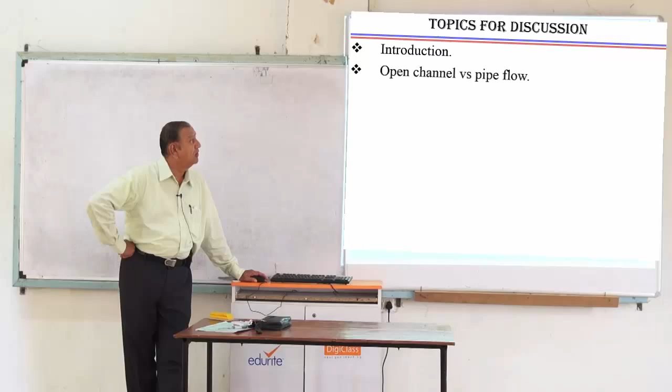So we are going to consider the following topics in our discussion today. First we will have a little introduction to open channel flows and a comparison between the open channel flow and the pipe flow, followed by the various classifications of open channel flows. Like the pipe flows, the open channel flows are classified into various categories of flow.

Then you will receive a little information on the various terms and definitions, as well as the geometric properties of some standard channel sections. Then how the velocity varies within the open channel, as well as the pressure distribution in an open channel, will be considered.

Followed by this, we will take up the basic equations available for the analysis of open channel flow. The most general equations used are Chezy's equation and the Manning's equation, so we will be considering these two equations.

Lastly today, we will initiate a discussion on the uniform flow and the uniform flow computations. So let us proceed.

What is an open channel flow? Any flow where the liquids flow with a free surface, unlike a pipe flow, that means there must be an interface between the water surface or liquid surface and air, that is the atmosphere above it. So that is called an open channel flow.

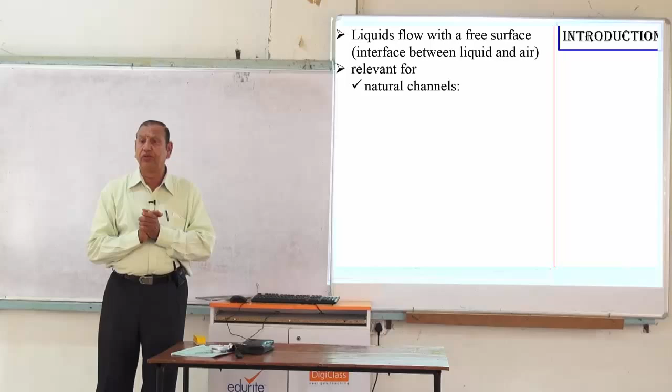Now these open channel flows are relevant for natural channels like this. This is a natural channel formed by nature. It may be a river, or it may be a creek, or it may be a natural stream.

Then streams, creeks, floods - whenever there is a flood, the flood water will be flowing. So that also comes under the category of a natural open channel flow.

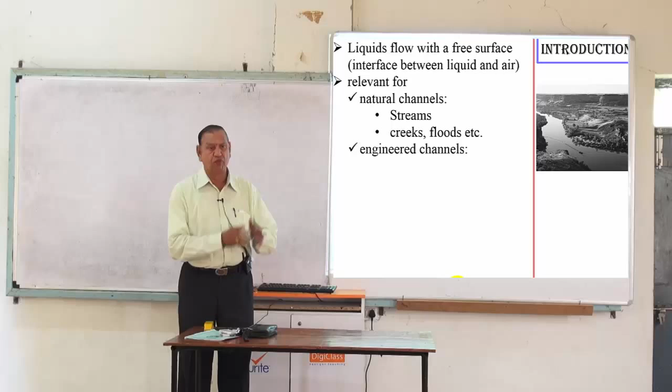Then the engineered channels, that means the channels which we construct for our application, for our usage, to convey the liquid from one place to the other, apart from the pipe flow - these are open channel flows.

This is a channel which is constructed, a lined channel which brings water from a source to a destination point where it is used. Now the water can be used either for power generation or irrigation or for industry or domestic use. So that is the engineered or artificial, man-made channel.

Canals, sewer lines where the wastewater flows, culverts. The culverts can be either full or partial. Culverts are meant to convey the storm water - whenever there is a heavy rain, the rainwater will be flowing underneath the bridge or highway.

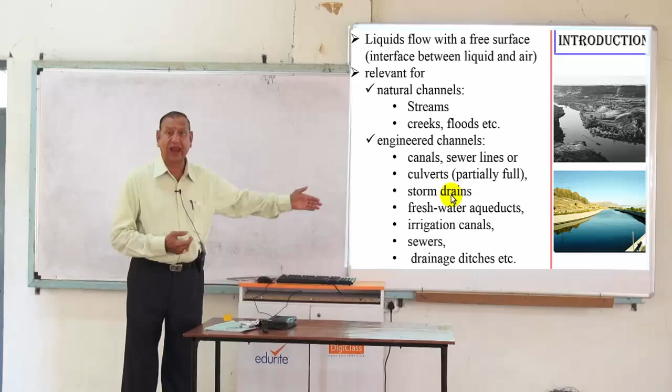Storm drains, freshwater aqueducts - an aqueduct is a structure constructed near the junction of a natural stream and an artificial canal. Irrigation canals, drainage ditches - all these things come under the category of artificial or man-made channels.

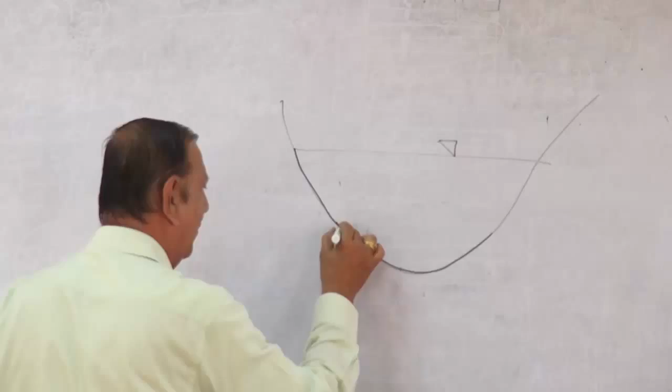Why? It is due to the no slip condition. What is no slip condition in fluid mechanics? The velocity of the fluid adjacent to the boundary will be same as the velocity of the boundary. Now here the boundary is fixed, so it is not moving. Therefore, the velocity of the liquid adjacent to the boundary will have the same velocity, that is zero velocity. So this is called the no slip condition.

It is a very powerful boundary condition in all fluid mechanics problems. So due to that, the velocity will be zero. You can see here, these are the velocity lines - all along this, the velocity is zero, and all along that, the velocity is zero.

As you proceed towards the free surface, the velocity increases. So the velocity is approximately constant all along this line, and the magnitude of that velocity is maybe 0.5 meters per second or feet per second.

So you can see there will be a maximum velocity not exactly at the free surface but slightly below it. The reason is, at the free surface there will be a lot of debris, and the air may be blowing in the opposite direction. So that will offer resistance and reduce the velocity at the free surface. Otherwise, if you just take a cross section and draw the velocity, it should be in fact like this.

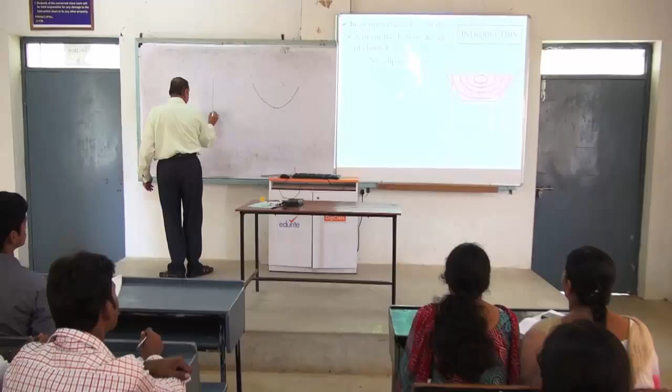Maximum velocity here, zero velocity here. But in reality, the maximum velocity will not be at the free surface but slightly below the free surface. So this is the maximum velocity, slightly below the free surface.

The velocity also varies in the streamwise direction, that is in this direction, perpendicular to the plane of the board. So the velocity will be varying in this direction, and it may also have a transverse direction. So therefore, the flow is always three-dimensional.

But for our analysis, we will assume only one-dimensional approximation for all practical purposes. To solve the practical problems, we consider the velocity to be varying only in one direction. So that is the simplification which we make.

As I was telling, there is a similarity as well as a difference between the pipe flow and the open channel flow. So let us see what are the things that make a pipe flow and an open channel flow. Now this is a pipe in which flow is taking place. This may be sloping like this or sloping in the other direction, or it may also be horizontal. Similarly, this is a channel which is shown with sloping downwards in the direction of flow. So what are the things that differ in between? What is the difference in between these two?

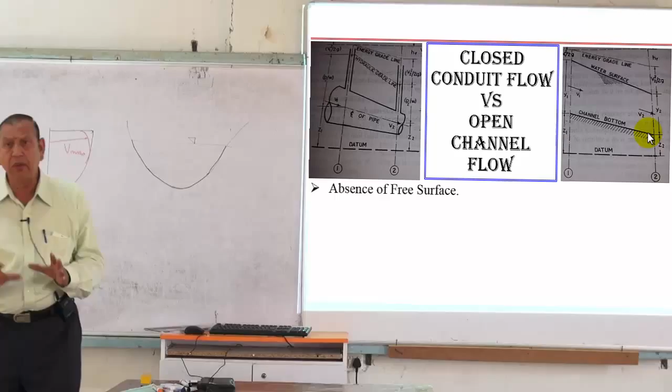Let us see. In the case of pipe flow, there will not be any free surface. It is under pressure. Whereas in the case of open channel flow, you can see this is the water surface, this is the free surface. It is exposed to atmosphere. So the presence of a free surface is the characteristic feature of an open channel flow.

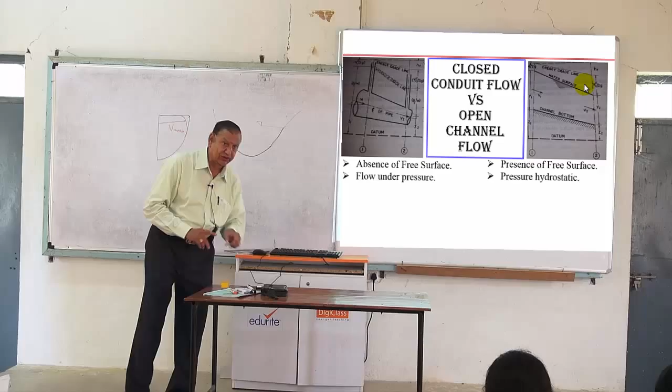Flow is under pressure, whereas the pressure in the case of open channel flows is hydrostatic. What is hydrostatic law of pressure? P is equal to gamma times Y, where Y is the depth of the point under consideration below the free surface. So in that figure, if you take this point, this depth is Y1, so the pressure here is gamma times Y1. If this depth is Y2, the pressure here is gamma times Y2. So that is hydrostatic pressure.

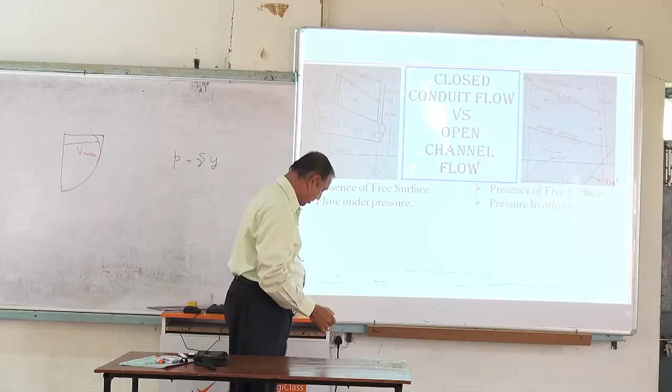In the case of a pipe flow, in order to get the hydraulic gradient line, we can insert a number of piezometer tubes. So this is a piezometric tube. When you insert a piezometric tube in a pipe, the liquid level will rise in it. To what extent will it rise? It will rise to a certain extent given by the sum of the datum head and the pressure head. Similarly, at the other point also the water will rise to an extent equal to the datum head plus pressure head. So the line joining the water levels in the piezometric tubes attached to a pipeline will give you directly the hydraulic gradient line.

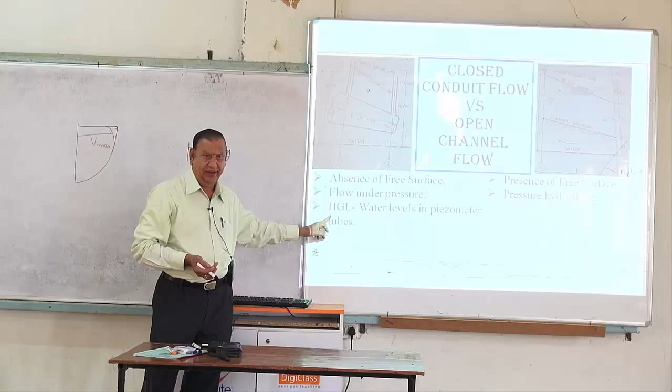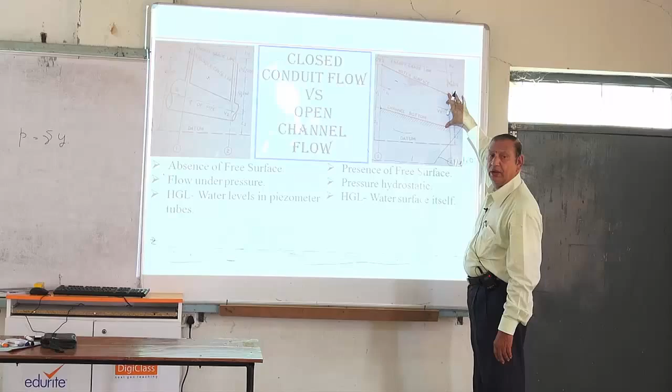In case of free surface flows, that is open channel flows, the water surface itself is the hydraulic gradient line. Because if I take this as the datum, this is the datum head and this is the pressure head, because here the pressure is atmospheric. Similarly, if I take another point here, this is the datum head and this is the pressure head. So this is pressure plus datum, that is the water surface. So in the case of pipes, the hydraulic gradient line is given by the line joining the water levels in the piezometric tubes. In the case of free surface flows, it is the water surface line itself.

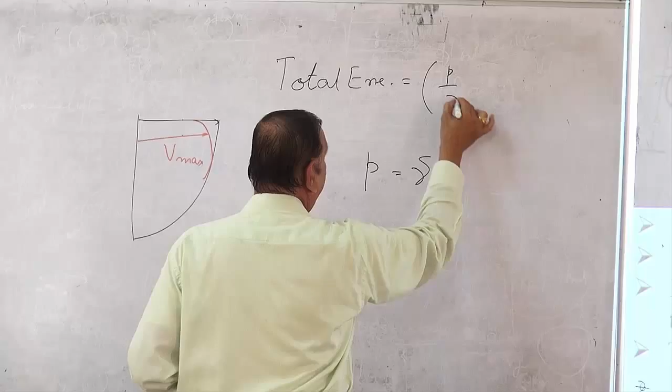And how about the total energy line? The total energy line is one velocity head above the hydraulic gradient line, because total energy is given by P by gamma plus Z plus V square by 2G. So this is the hydraulic gradient and this is the velocity head. So in the case of pipe flow, TEL is above HGL by a value V square by 2G. And in the case of open channel flows also the same thing.

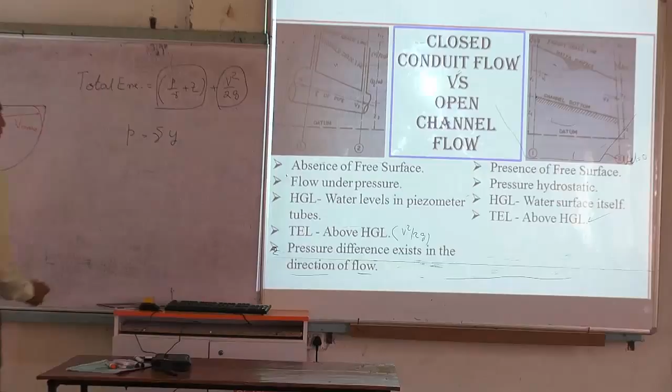Then when you consider the pipe flow, if you take different points, the pressure will be varying, so there will be a pressure difference between any two points in the direction of flow. Whereas here, in the case of open channel flows, the pressure is constant along the free surface. And what is the magnitude of that constant pressure? It is atmospheric pressure.

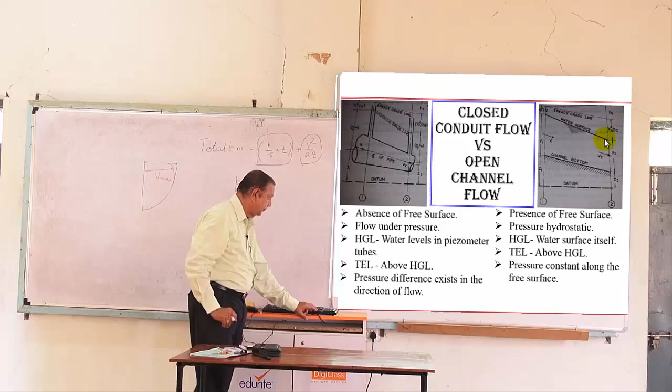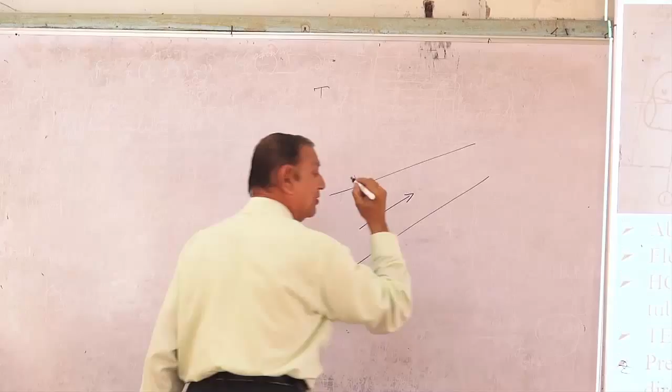Then, pipe flows can be sloping in any direction. It can be horizontal, it can slope downwards in the direction of flow, or it can slope upwards in the direction of flow. We have seen earlier, if suppose there is a pipe, the flow can take place in this direction. It is not necessary that the flow always take place when the pipe is oriented downwards.

The direction will depend upon the difference between the total energy. So if H2 is less than H1, the flow will be taking in that direction, from higher energy to lower energy. So if H1 is higher, which H is again equal to P by gamma plus V square by 2G plus Z.

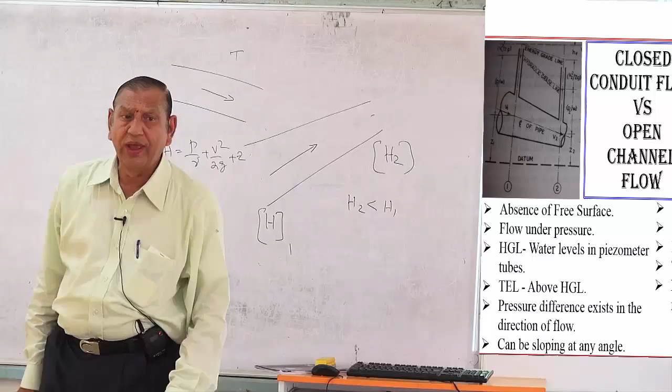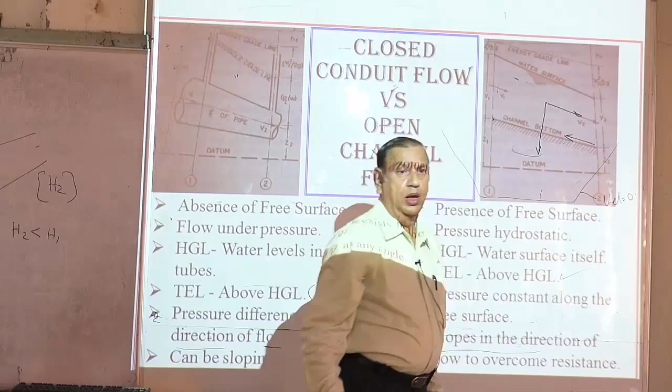Whereas in the case of open channel flows, the flow is possible only when it slopes down in the direction of flow. Why? When it is sloping down, there will be a component of the weight acting downwards, and the component will be acting in this direction. So this component will be compensating the frictional resistance. Only then the flow is possible. Otherwise, it is not possible.

So after considering the difference between a pipe flow and an open channel flow, let us proceed towards the classification of open channel flows. Now in pipe flow we have seen the flows are classified based upon the variations of velocity with respect to time, similarly with respect to space. So here also the open channel flows are classified based upon the temporal variations, that means the variations with respect to time. So they are classified as steady flow and unsteady flow.

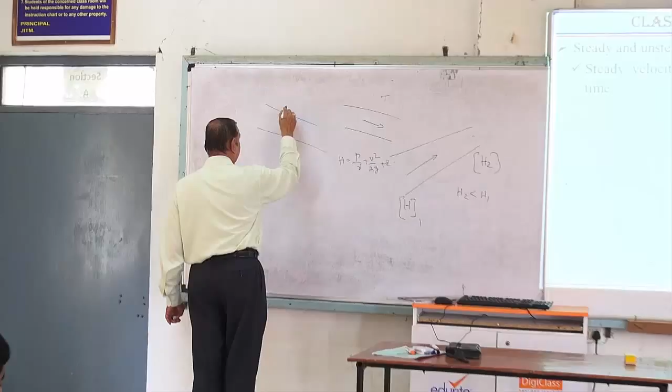What is steady flow? Steady flow means the velocities and the depth at any given point in the open channel flow will be constant. They will not change with time. So if I consider an open channel like this, and any section here, at this section with respect to time, if the velocity is constant, not changing with time, then we call it steady flow. On the other hand, if it varies with time, then it is an unsteady flow.

Can you give me an example of unsteady flow? The situation where the velocity changes with time or the water level changes with time. Whenever there is a rain or storm, what will happen initially? The water level will be less. As the rain water enters into the channel, the stage of the water will raise, so there will be a change in the velocity. That is an unsteady flow. So the natural flows, or flows in natural streams and rivers during flood times, is an unsteady flow.

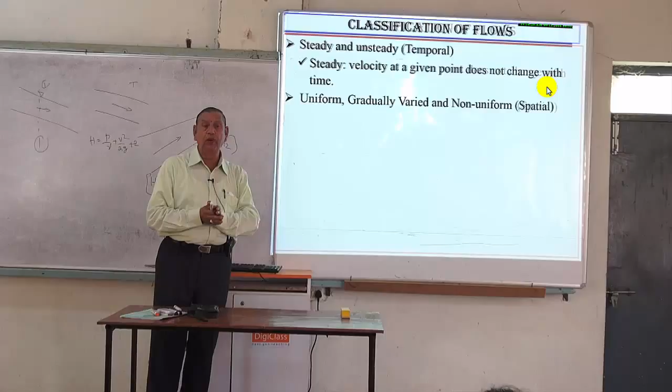Then the other classification is based on the variations with respect to space, the distance. So according to the distance, the flows are classified as uniform or non-uniform: uniform, gradually varied, and non-uniform. Why we call it gradually varied and non-uniform is because unlike in pipes, in open channels, the variations with respect to distance can be over a long distance or within a short distance. If the variations are over a longer distance, it is called a gradually varied flow. But if the variations are within a short distance, they are called rapidly varied flows. So in non-uniform flow, we have two categories: gradually varied flow and rapidly varied flow.

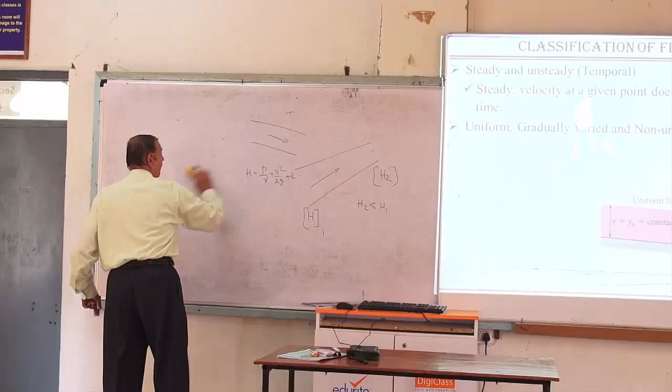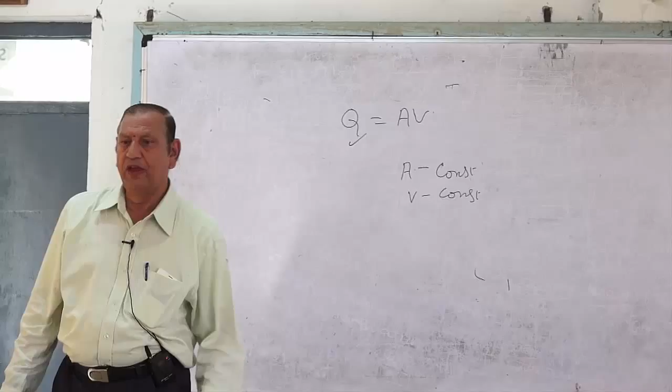So a uniform flow is the one where the velocity is constant at different sections. If you consider one section here, another section there, another section there, at all these points the depth is same. So if the cross section is not changing, naturally velocity will relate to area. What is the relationship between discharge, area and velocity? The continuity equation: Q is equal to A into V. So when A, the cross-sectional area, is not changing, then V will be constant for a given Q. For a given Q, if area is not changing, the velocity will not change. So area means, if I take a rectangle, B into Y is the area. So if B and Y are constant, automatically V is constant.

So that is a uniform flow. In the case of a uniform flow, the depth remains constant throughout the direction of flow. Uniform velocity, at a given instant of time, does not change with respect to distance along the length of the channel at a particular time.

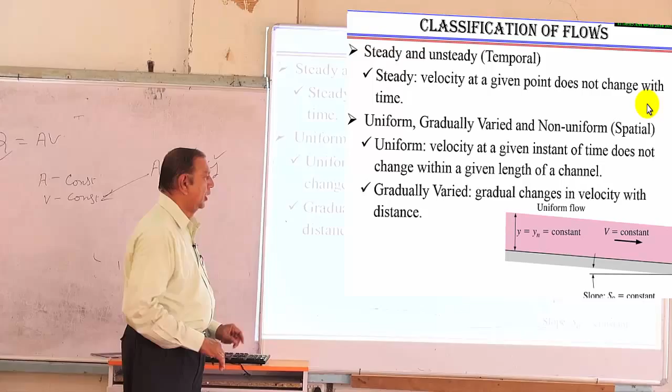So, gradually varied and rapidly varied. And in addition to these types of flows, there is another classification as in pipe flows: laminar and turbulent. Same criteria. Laminar means viscous flows, where viscous effects are more predominant compared to inertia. Turbulent flow involves mixing, where inertial effects are more predominant. So the distinction between laminar and turbulent flows will be based upon the magnitude of Reynolds number. The Reynolds number is defined as usual.

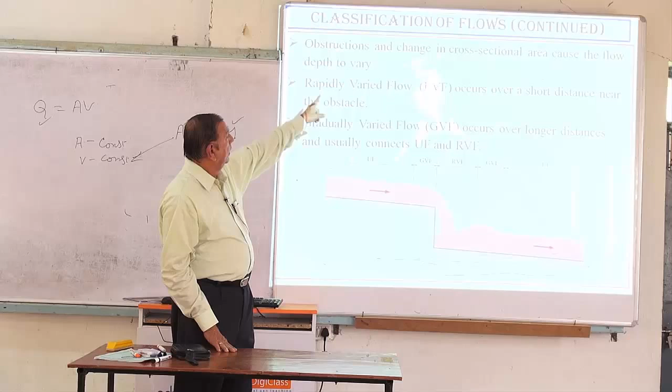So I was telling about gradually varied flow and rapidly varied flow, how and why there will be a change in the distance or depth of flow when flow is taking place. Unless you put some obstruction, there will not be any change. So the change in depth happens only whenever there are obstructions or a change in the cross section, either with the same cross section throughout, or from one section to another if there is a change in the cross sectional area. So then this will be causing non-uniform flow.

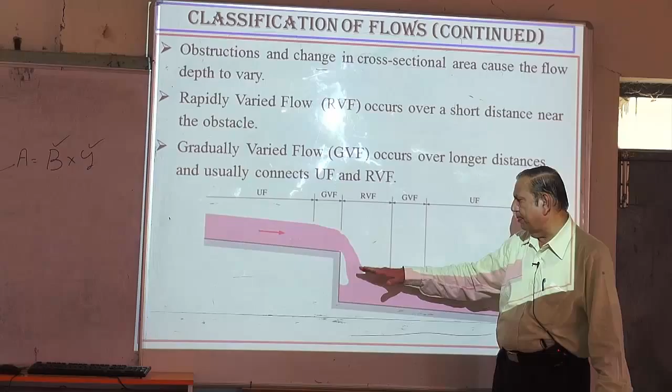Now rapidly varied flow, you can see here in this figure, there is a gradually sloping channel with a sudden drop and again a gradually sloping channel. So in the sloping channel, as the flow progresses, the depth will not vary, and the depth will be constant and uniform, and as it approaches this drop, there will be a change, because from this constant depth it has to come to this depth. So there must be a transition in the depth. That will be gradually happening. Now when you come to this point, which we will call a brink, the depth suddenly changes within a short distance. So this is called the rapidly varied flow.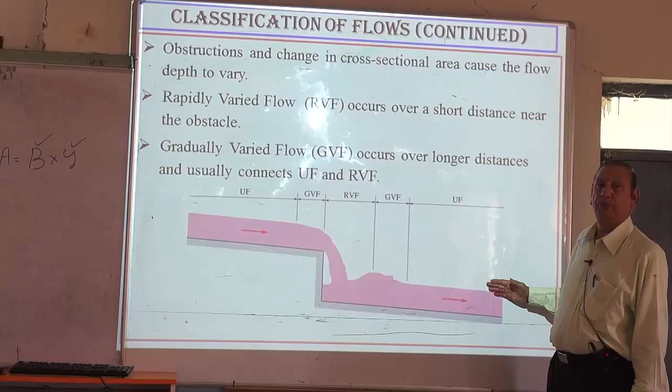Again, gradually varied flow, uniform flow. So normally, gradually varied flow will be connecting a uniform flow and a rapidly varied flow. So gradually varied flow is a transition between uniform and rapidly varied flow.

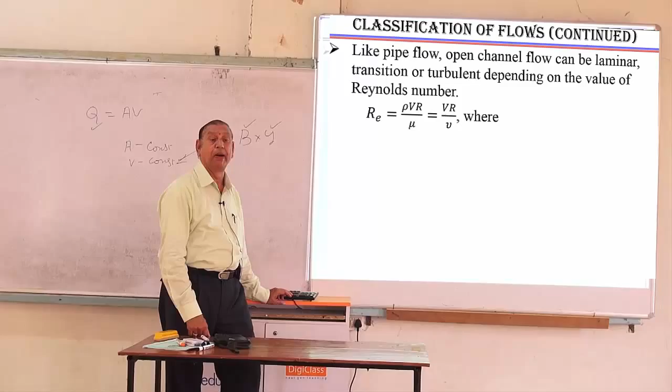Let us proceed further. This already I told, and we need not discuss the influence of Reynolds number. You know how we define Reynolds number: it is the ratio of inertia forces to viscous forces, rho V R by mu. In fact, the definition of Reynolds number is rho into velocity into some characteristic dimension. In case of pipe flow, we have taken the diameter, but here we will take some other parameter, either depth of flow or some other thing.

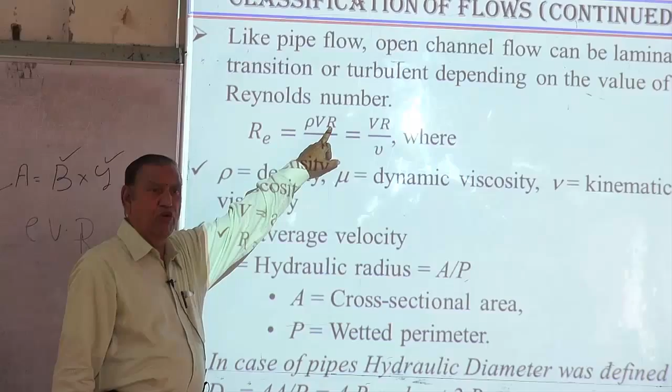So rho is the density, mu is the viscosity, dynamic viscosity, or we can write it in terms of kinematic viscosity also. As I was telling, in the case of pipe flows, this was diameter. Now in this case, it can be the depth of flow or the hydraulic radius. Hydraulic radius is area divided by the wetted perimeter, P. So A is the cross-sectional area, P is the wetted perimeter.

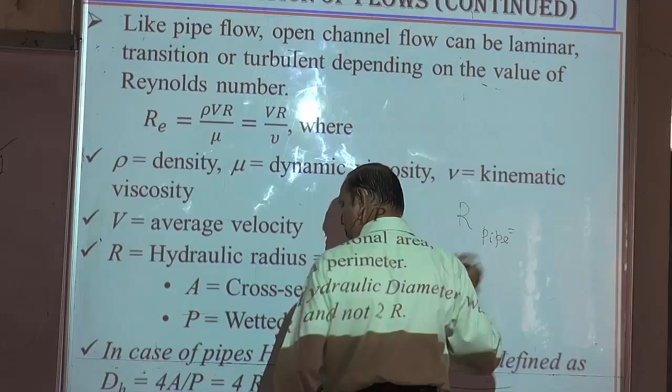In case of pipe flow, what is the value of R? R for pipes is equal to area divided by wetted perimeter. What is the area? Area is pi d square by 4. What is the wetted perimeter for a pipe flow? The flow will be full, so what is the perimeter? Pi d. So it will be d by 4. R in case of pipe flow will be d by 4.

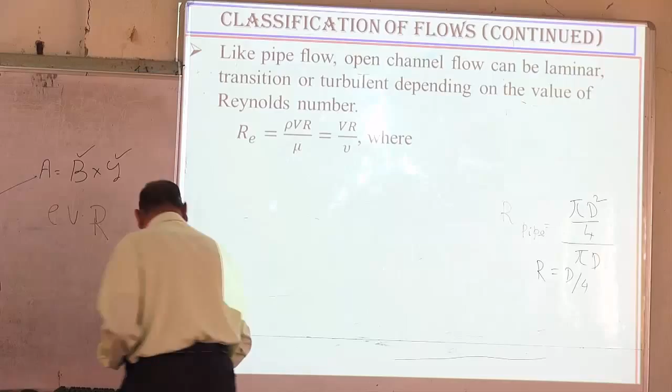Before proceeding further, let us understand some standard terminology, the terms which we use in our definitions. So the first one is the channel section, referred as A, the cross-sectional area. The cross-sectional area is always taken normal to the flow direction. So if the open channel is sloping in this direction, that is the direction of flow. Normal to this, what is the area? This is the area of flow.

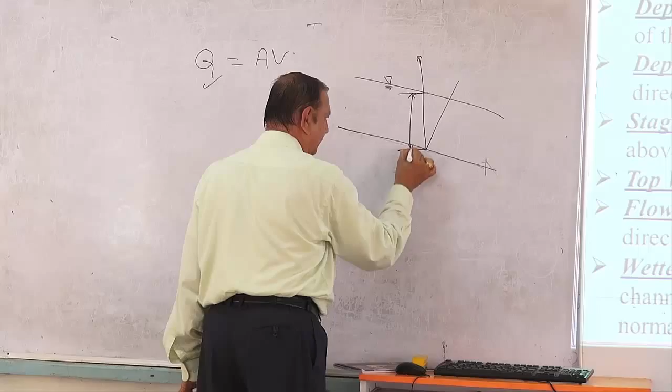Depth of flow, y, is the vertical distance of the lower point of the channel section from the free surface. So it is the vertical distance, not normal to the channel. You can see here, if you have a channel which is sloping like this, this is the free surface. There are two things: one is the vertical direction, the other is the normal direction. So this is what is called y, the vertical distance between the free surface and the lower part. So that is y, depth of flow.

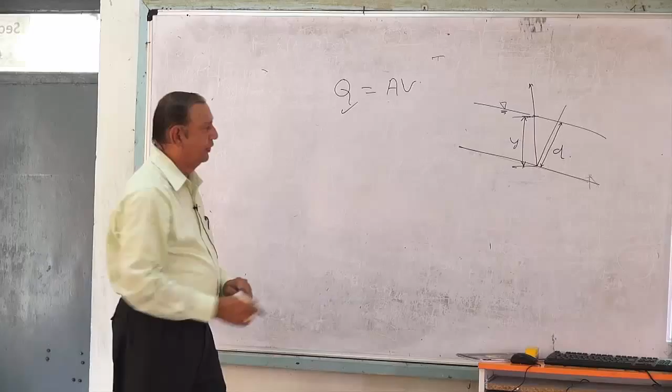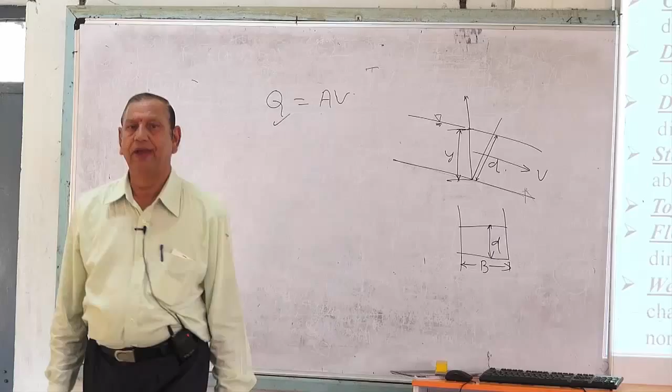Then, depth of flow section is this one. Now, when we want to calculate the discharge, Q is area into velocity. Say if we take a rectangular channel of width B, what is the equation for area of a rectangle? B into depth. Which depth do we have to take, y or d? D, because velocity is in this direction, and area is always normal to the velocity. So normal to the velocity means d. So B into d into V will give you the discharge.

Then, the stage of flow is the elevation or vertical distance of the free surface above a specific datum. I can choose a datum like this.

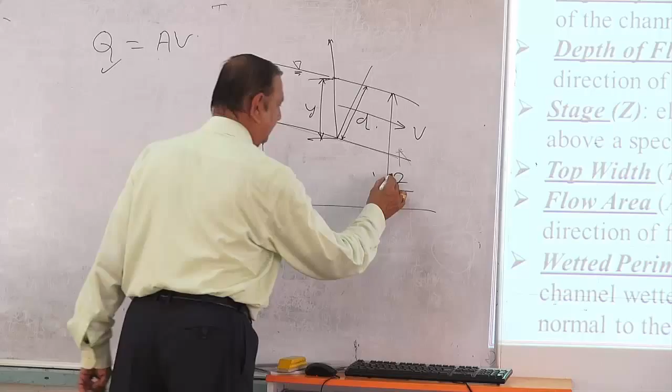So, this is the stage Z, this is the stage here, capital Z. Suppose if it is a horizontal channel, then I can take this as the datum. So, this itself will become the stage.

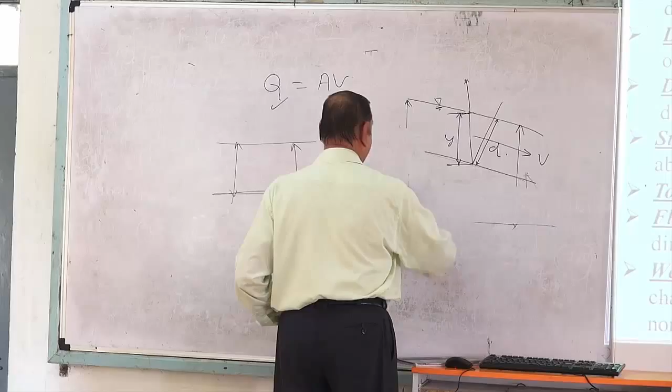Then, top width. Why should top width be considered? Because in case of rectangular channels, both the width at the top and the bed width at the bottom are the same. If you take a rectangular channel, this is the bed width, and this is the water level. So both are same.

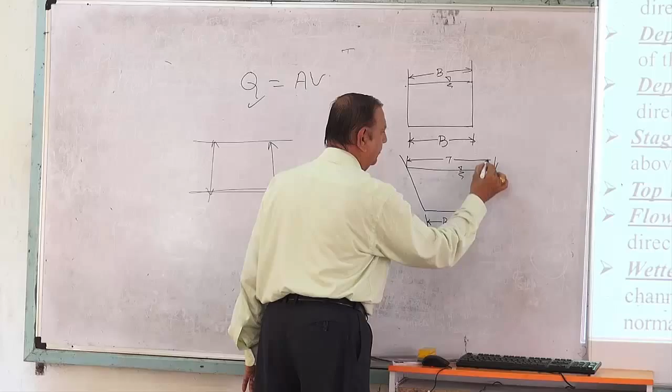But if you take any other section, say a trapezoidal section, this is the bed width, and this is the free surface, and this is the top width. So bed width and top width are not the same. Similarly, a triangular section also.

If you take a pipe where flow is not full, this is also an open channel flow, a free surface flow. So this is the top width. Top width is the width of the channel at the free surface.

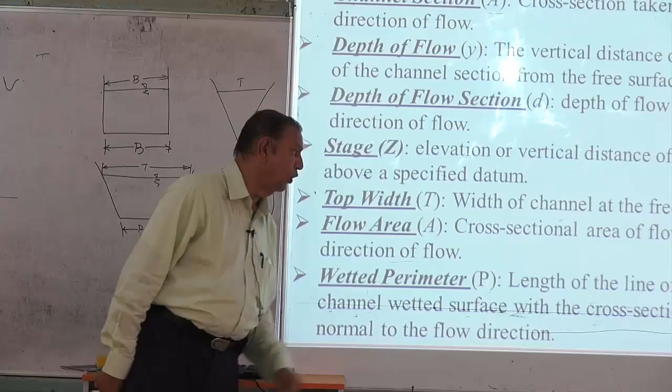Flow area is the cross-sectional area of flow normal to the direction of flow. Then wetted perimeter is this, all along the contact surface. This is the wetted perimeter.

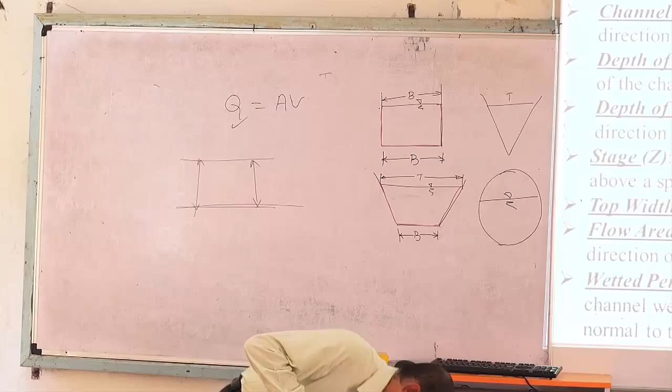What is the expression for wetted perimeter in case of a rectangle? It is B plus twice the depth. Here, B plus twice the sloping length. Normally the sloping length is designated 1 in Z. So if this is Y, what will be this value? ZY. This is again ZY.

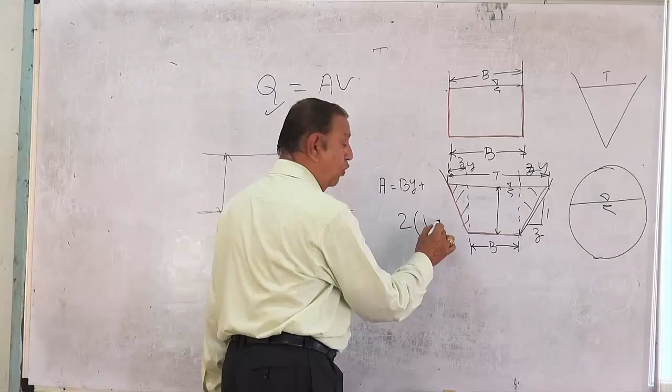So here for a trapezoidal channel, the area will be BY plus the area of two triangles, twice into half Y into ZY. So the area for a trapezoidal channel is equal to BY plus ZY square.

Similarly, you can calculate the wetted perimeter. The one point you have to remember is that the wetted perimeter does not include the free surface. It is only B plus 2Y.

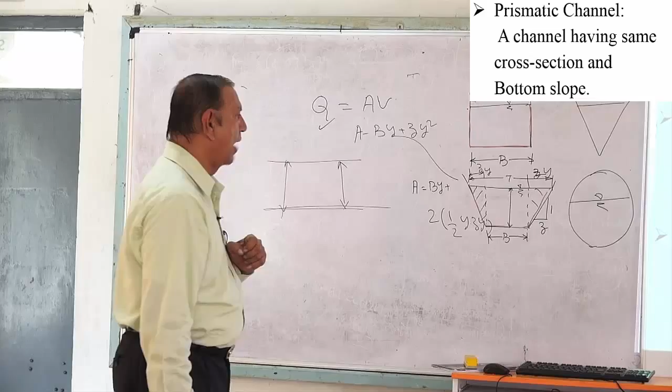Then we define what is known as a prismatic channel. A prismatic channel is a channel having the same cross section and bottom slope throughout. A non-prismatic channel means a channel where either the cross section may change, or from some point onwards the slope may also change.

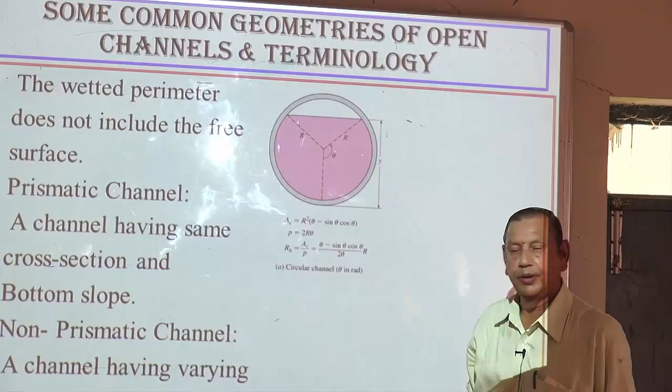Let us look at some standard geometric open channel sections. A pipe with a free surface: if your free surface is here, the area, if the radius is R, is given by R squared into theta minus sin theta cos theta. Then P is equal to 2R theta, where theta is this angle. The total is 360 degrees.

Then a trapezoidal section, R is equal to A by P. A rectangle is simple, with its area and wetted perimeter.

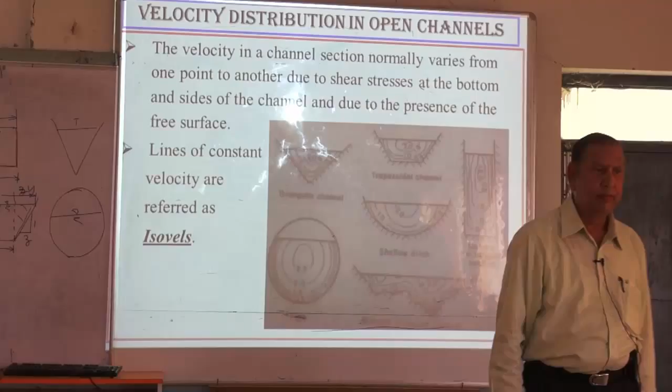So after learning some terminology and identifying certain standard geometric channel sections, let us proceed to how the velocity varies within a channel and how the pressure varies. In our topics for discussion, we have velocity distribution and pressure distribution.

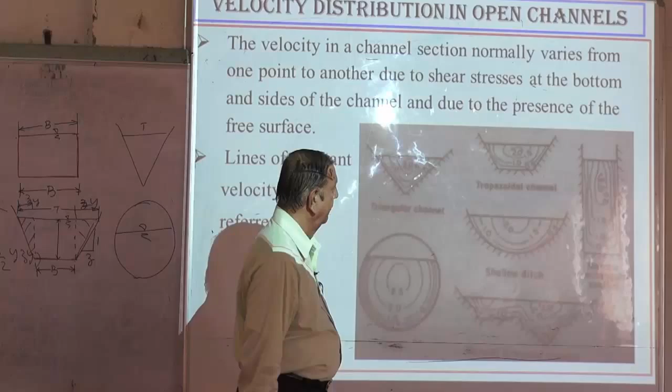Here I have shown some figures which indicate how the velocity will be varying. You can see in a triangular channel, these are the lines of equal velocity. A line of equal velocity is called an isovel. Iso means constant, vel means velocity. So lines of constant velocity are called isovels.

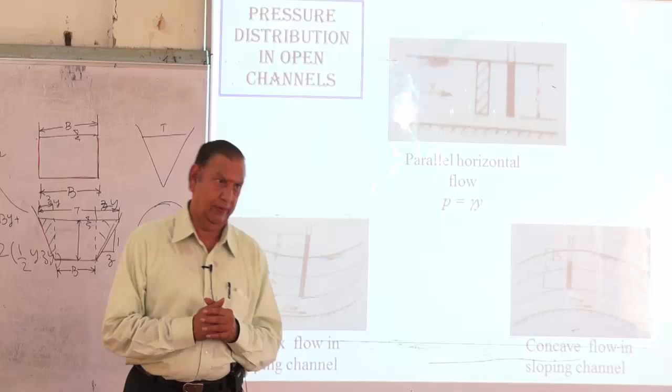Then, how does the pressure vary? Now, when comparing open channel flow and pipe flow, we learned that the pressure will be throughout atmospheric. That is not always true; it may appear correct to you, but there are certain conditions applied. If it is a parallel horizontal flow, then the depth will be the same throughout.

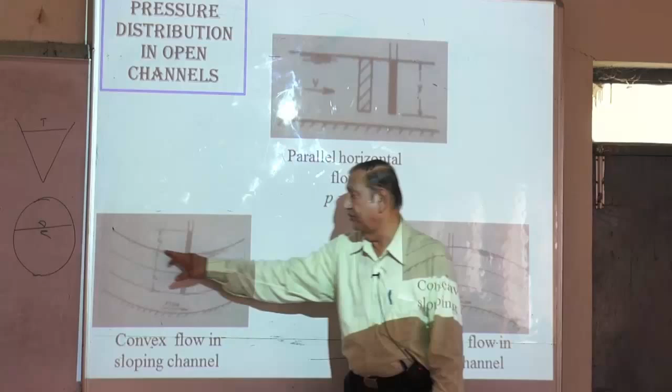Parallel horizontal flow: then the pressure is always equal to gamma times y. Suppose it is a convex flow in a sloping channel, then the pressure will be more than atmospheric pressure. If you introduce a piezometer, it will rise above the free surface, so the pressure will be more than hydrostatic pressure. In the case of concave flow, it will be less than atmospheric pressure because of the gravitational pull acting, causing the pressure to fall below atmospheric. So, in a horizontal parallel flow it is purely hydrostatic, in convex flow it is greater than hydrostatic, and in concave flow it is less than hydrostatic.

Now, when we come to normal natural channels with parallel flow but in a sloping channel, what will happen? The pressure distribution will obviously not be hydrostatic; it differs from hydrostatic. But under certain conditions, we can assume the flow to be hydrostatic. So, let us assume a sloping channel with flow taking place.

Take a small element. Let the velocity be uniform at a section and the flow parallel to the channel bottom. We will consider a free body of a column, and that free body will be normal to the channel bottom.

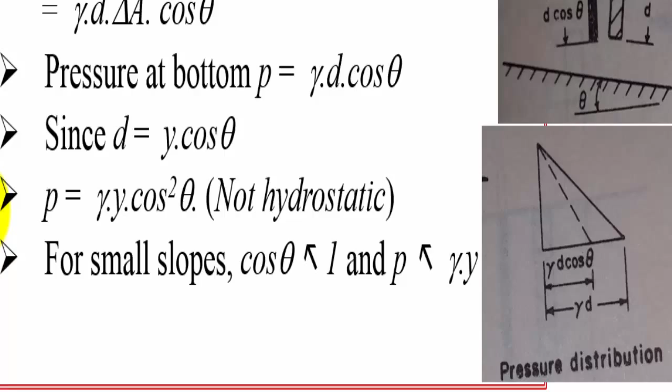Now hydrostatic means what? According to our definition, hydrostatic pressure means P equals gamma times the depth of the point below the free surface, that is gamma times y. So gamma times y is the hydrostatic pressure. But here P is gamma y cos square theta.

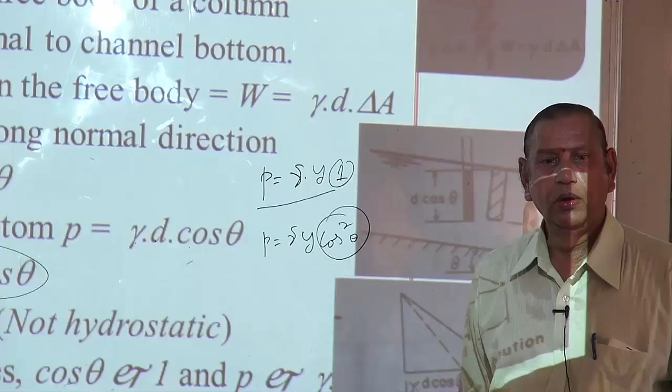You have to find out whether cos square theta and 1, compare these two, which will be more? Cos square theta is always less than 1. So in a sloping channel, the pressure will be less than hydrostatic pressure. But when you take a very small slope, cos theta is almost equal to 1, and the pressure will therefore be gamma y. So we can use, for small slopes, the pressure as gamma y itself, the hydrostatic pressure itself.

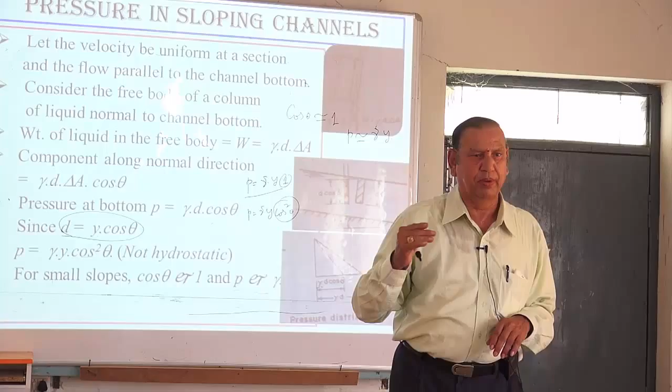Why are we considering this point? Because this is required in all our analysis. In open channel flow analysis, we have to find out the pressures, forces, etc. So in all situations, we have to make this assumption, which will be valid only when the slope is small.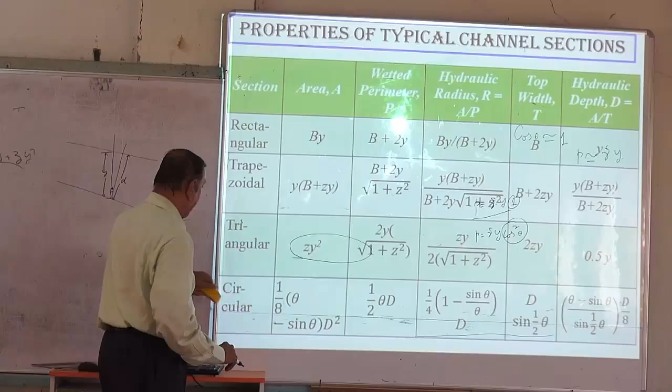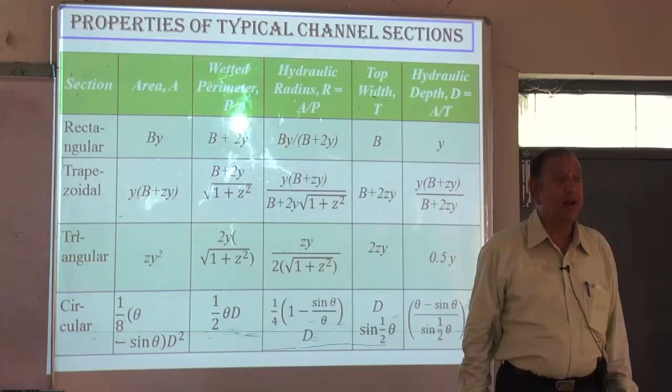Now here I have given you a table for your reference and for working out problems, for standard channel sections: the area, the wetted perimeter, the hydraulic radius, the top width and the hydraulic depth. Now there is a difference between hydraulic radius and hydraulic depth. The hydraulic depth is the ratio of area by top width.

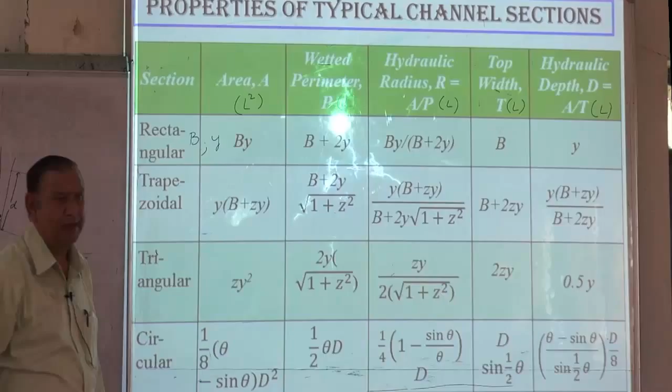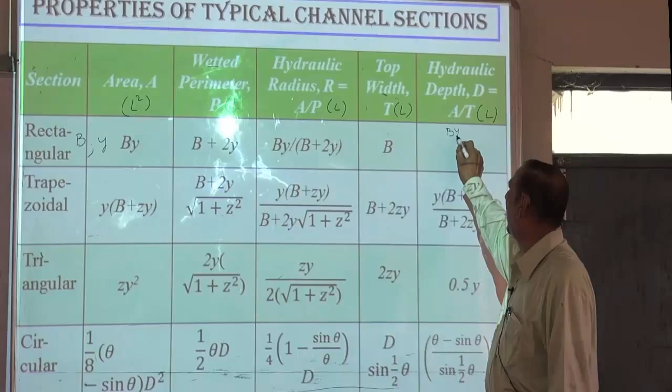So B is the width, the bed width, Y is the depth. The area will be the product of B and Y. Wetted perimeter is B plus 2Y, and hydraulic radius is BY, the area, divided by B plus 2Y. Top width will be the same as bed width in case of a rectangular channel, and the hydraulic depth will be the same as the depth of flow, because A is B into Y divided by top width B, so this is equal to Y.

Whereas in a trapezoidal channel it will not be so, it will differ. So this is the trapezoidal channel: By plus Zy square, or taking Y outside, Y into B plus Zy. So in a trapezoidal channel, this is how it will be.

This is the channel, this is B, this is Y, this is T, and this is 1 and Z. I can say when Z is substituted as 0, it will become a rectangular channel. A trapezoidal channel where Z equals 0 gives you a rectangular channel. You substitute Z equals 0 here, so what will be this value? A equals By. Similarly, if I substitute Z equals 0, P equals B plus 2Y. So, a triangular channel, a circular channel.

We will be using these things when we discuss more about the hydraulic sections, efficient hydraulic sections.

Now let us proceed for the basic equations in open channel flows. What are the basic equations? There are many equations which describe the velocity of flow in an open channel.

Open channel flows are analyzed with the help of one of several empirical equations. An empirical equation means an equation which is developed based on theory and field or laboratory observations. It is developed from a theoretical background, with the constants and/or exponents involved being decided through field studies and observations.

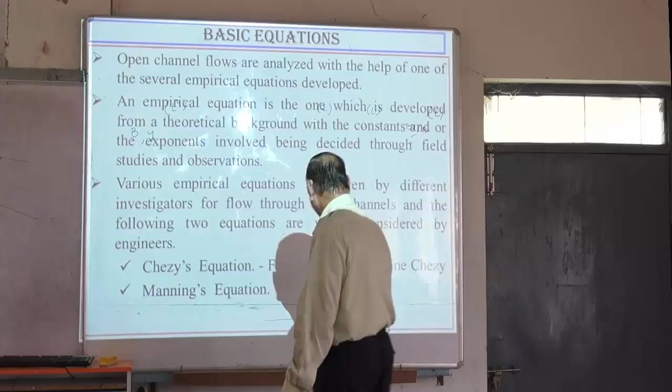Various empirical equations are given by different investigators, but we consider two most commonly used equations: Chezy's equation and Manning's equation. Chezy was a French engineer and Manning was an Irish engineer. Chezy developed the equation, in fact he derived it from the fundamentals in 1768, and Manning's equation was given somewhere in the 1880s.

Chezy's equation was developed in 1768. These are some of the assumptions involved in the development or derivation of Chezy's equation.

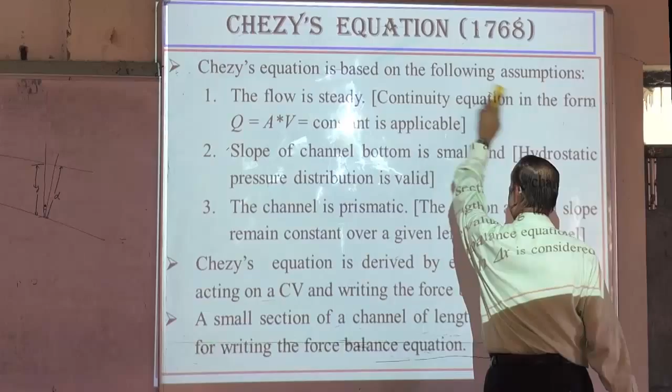We will take the help of the continuity equation, Q equals AV, and then we consider the channel to be sloping with a very little slope, a small slope. Why is this assumption required? In order to write down the pressure as hydrostatic pressure, P equals gamma y. When the slope is not small, I cannot write P equals gamma y; I have to introduce P equals gamma y cos squared theta. So the analysis becomes complicated.

Then the channel is prismatic, meaning the cross section is constant along the length. Chezy's equation is derived by evaluating the forces along the channel by considering a control volume and writing the force balance equation. So the forces acting are the force due to pressure, force due to the weight, and the bottom frictional resistance. The force balance equation is written. I will be skipping the derivation for the time being, and ultimately I will give the equation.

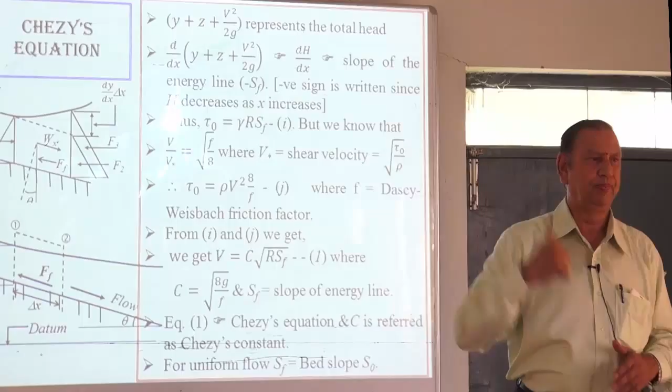So this is the equation which we have. The velocity is given according to Chezy's formula: V equals C root R SF, where SF indicates the slope of the energy line. And C, called Chezy's constant, is given by square root of 8G by F, where F is our Darcy-Weisbach friction factor.

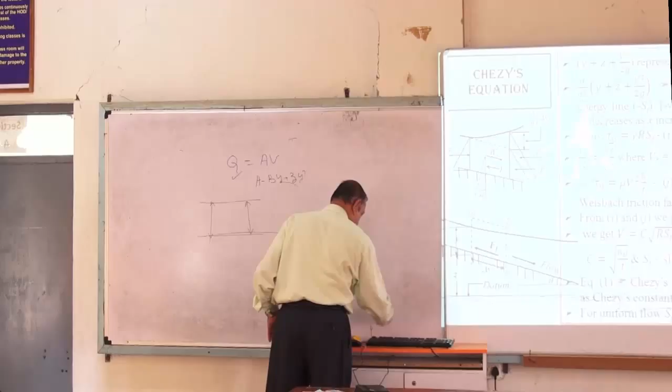So when the flow is uniform, what will happen in case of uniform flow? This is the channel bottom, this is the water surface, this is the hydraulic gradient line, this is the total energy line. So this is TEL, this is hydraulic gradient line or water surface, and this is the bottom. So the slope is S0.

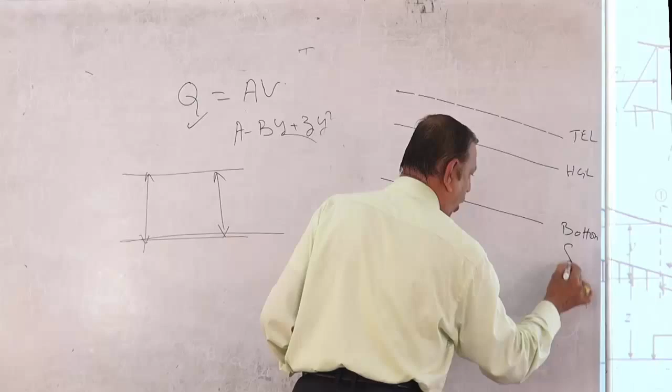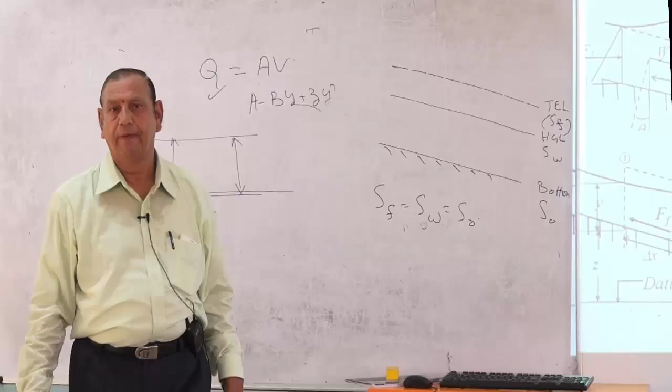Now because the depth is same, HGL will be parallel to the bottom. So if I call this SW, because the depth is the same and the cross section is not changing, the velocity will be the same throughout, so the velocity head will be the same throughout. So the total energy line, which is HGL plus one velocity head above it, will also be parallel. So the slope of the total energy line is SF, slope of water surface line is SW, and the channel bottom slope is S0. In the case of uniform flow, SF equals SW equals S0. So we can replace SF by S0 - that is Chezy's equation.

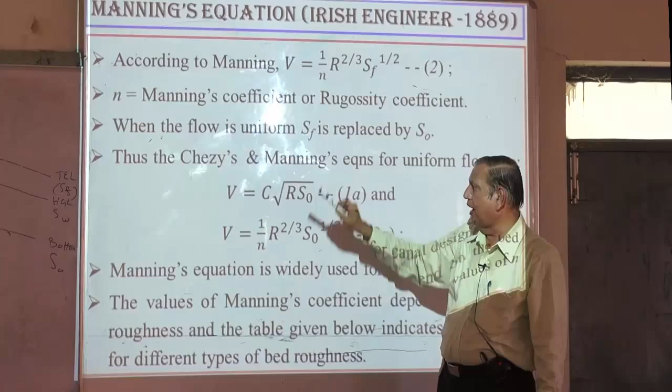Manning's equation is similar to that with a slight difference. Manning's equation is V equals 1 by N, R to the power of 2/3, SF to the power of half. So here, instead of R to the power of half as in Chezy's, we are getting R to the power of 2/3 - that is the difference. Here N is called Manning's coefficient, also referred to as the rugosity coefficient. So for uniform flow, SF is replaced by S0. This is Chezy's equation and this is Manning's equation. Normally, when we carry out designs, Manning's equation is mostly considered because of practical relevance and proven methodology. So let us stop today at this stage.